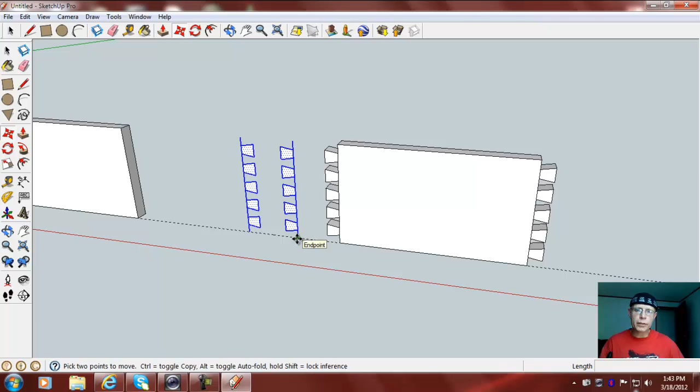They're not components or anything, so just slide them out of the way.

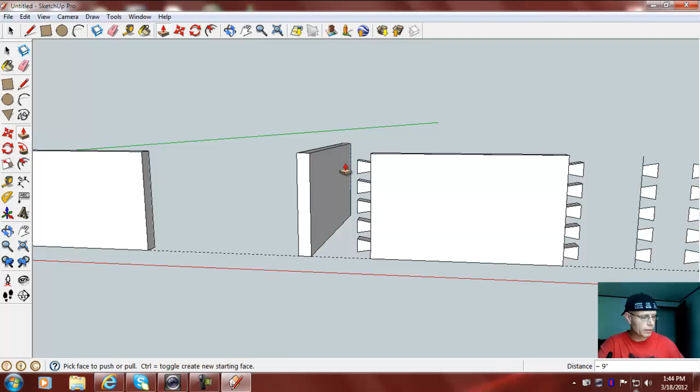Now we need our other side, so we need a rectangle that's 0.5 comma 4. This will be for our through dovetails. Push pull that back 8 inches, and now move your component piece into the one we just drew.

Right click, intersect faces with model, and then move the one we just created out of the way. Now hit push pull, and we're going to push pull that back to that line, double click on the rest. So we'll do that, and there we go. I'm not always good at double clicking.

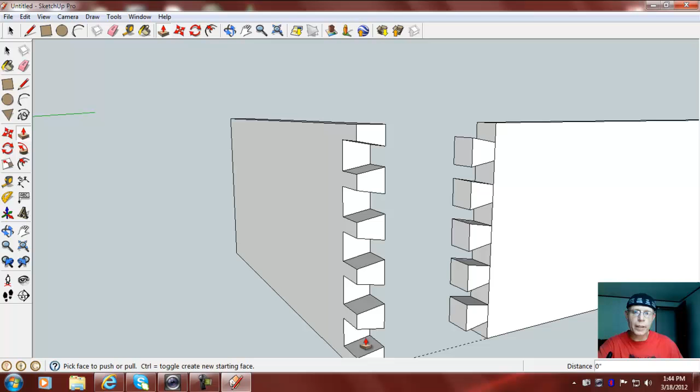And if you look at this now, we join those two together. I could make this a component, but I want to do the back side as well. And the challenge in the quiz was to make half blind and through dovetails out of the same box.

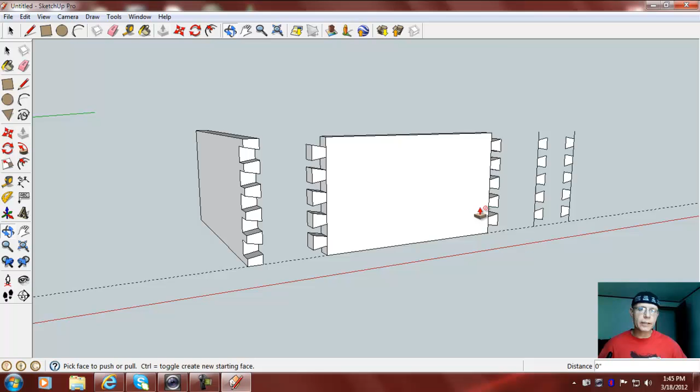So now we need another side and we need a back. So let's draw the other side, and yes, here we go. Let's see. So we're going to make this side, and it's going to be 0.75 comma 4, and push pull that back.

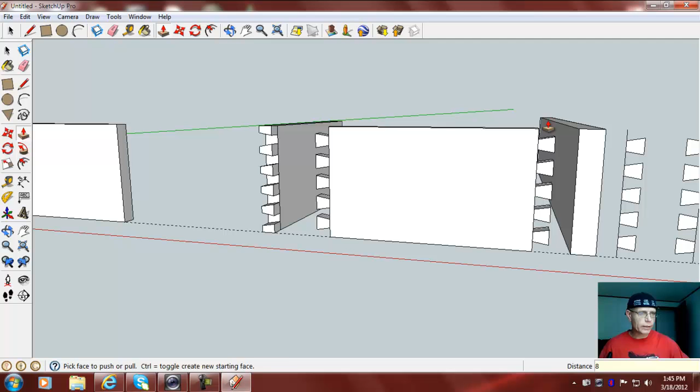8 inches, and now move this over, intersect face with model, move your component back, and push pull those back 1/2 inch, and you'll see now we have some half blind dovetails.

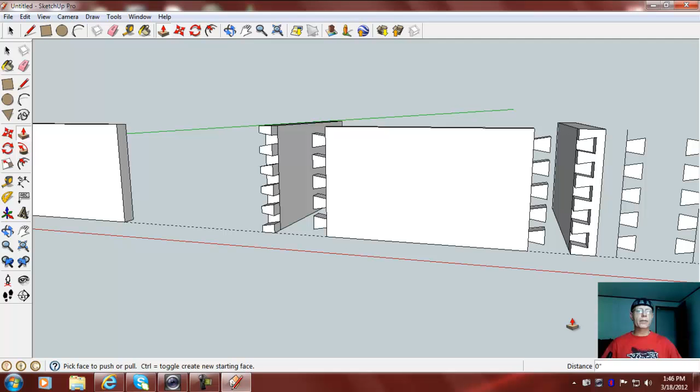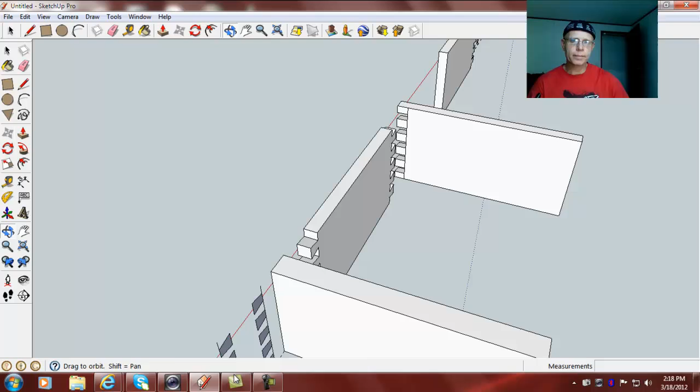Alright, I paused the video for a while and decided how I wanted to do this last part like we did in class. So basically what we need to do, this is already a component, so we want to move and copy that, and so I'm just going to move this back and make a copy of it and explode it so it's no longer a component.

Now if I push pull it, I'm only changing that one, and I'm going to make it 0.25 bigger. So now if I take my tape measure tool and just measure this real fast, it should measure to be 0.75, and it does. So that's the size I wanted it, because for the quiz they had to have two sides that were 3/4 thick and two sides that were 1/2 inch, and they needed through dovetails and half blind.

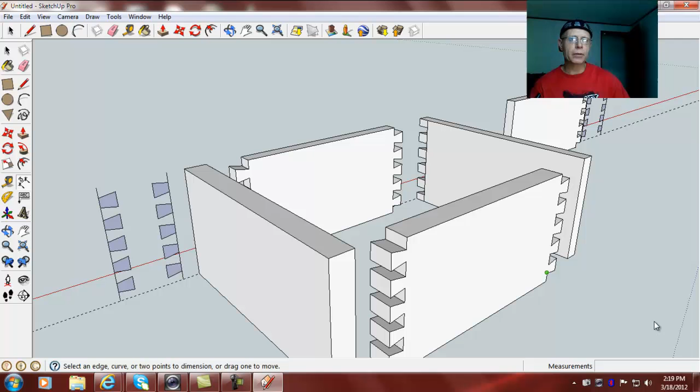So this way they will be getting both, but we do have one more. Let's see if I can do that real fast. There we go. Now I can right click and make it a component again, and create, and we'll call this side 2.

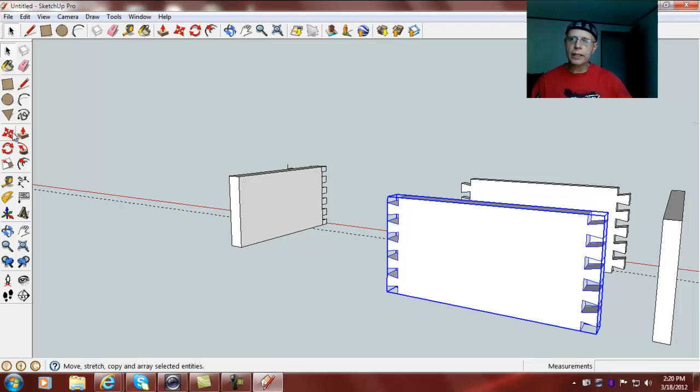There we go. And let's move that and intersect with the face over here. Okay, right click, intersect with model, and move it back. And we need to push pull all these back just like we did in the previous video.

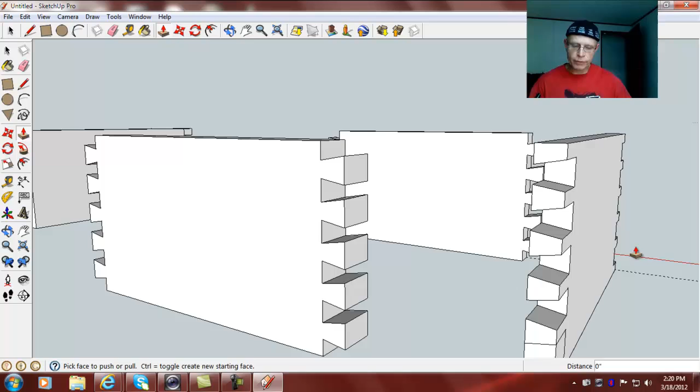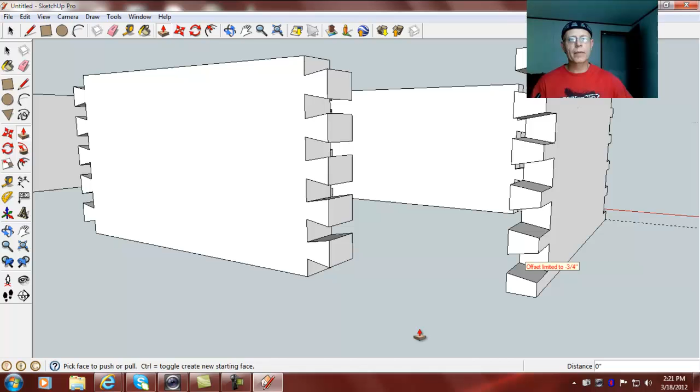Whoop. Okay, we'll just go back to there. Control Z. I always seem to mess one up. Okay, so and double click. There we go.

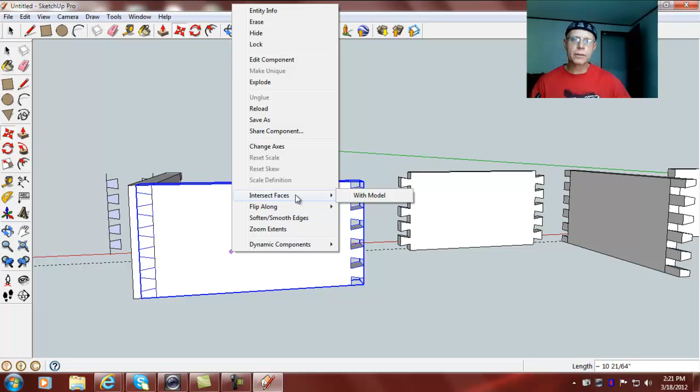Now I can do the same thing over here. I'm going to escape out, select this, move it over to this one, intersect with model, move it away, and push pull all these in. That should be the right size.

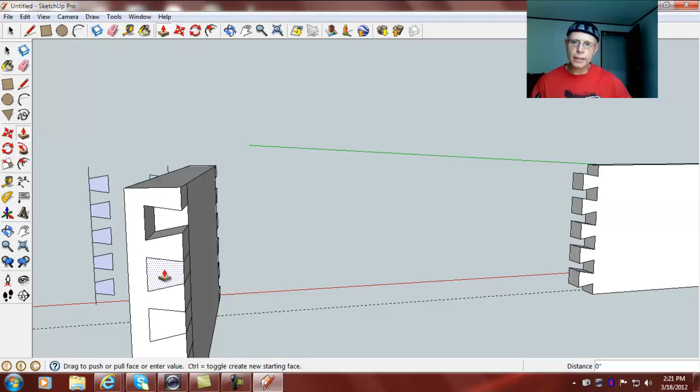Whoop. Like I said, I always try to mess one up. Okay.

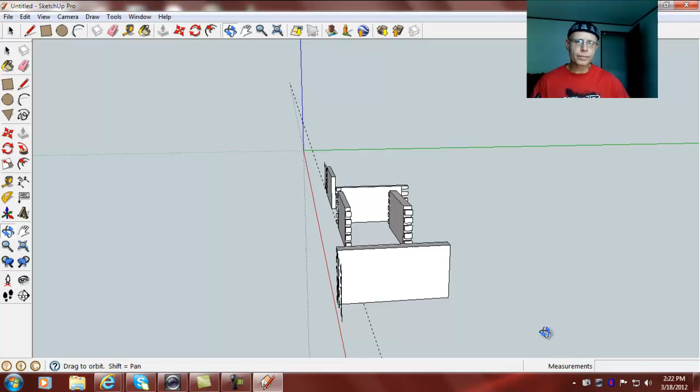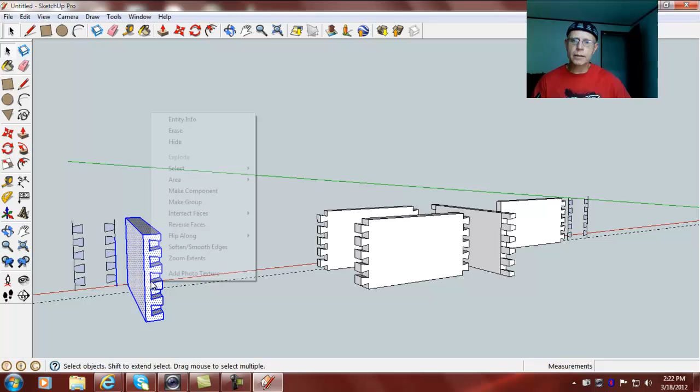Alright, we should be able to put this whole box together. We do have to make these other pieces components, would probably be helpful. So we'll make that a component, call that side 3, and this one a component, and we'll call that side 4.

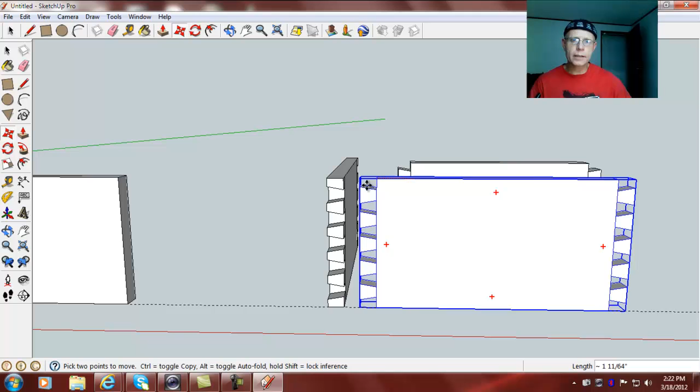And start moving things together. Okay, move this right there. And whoop. Control Z. Did I make this a component? I thought I did, but maybe I didn't. Thought that was side 4.

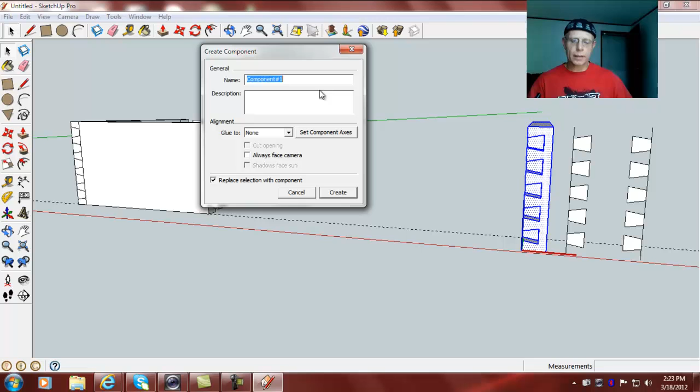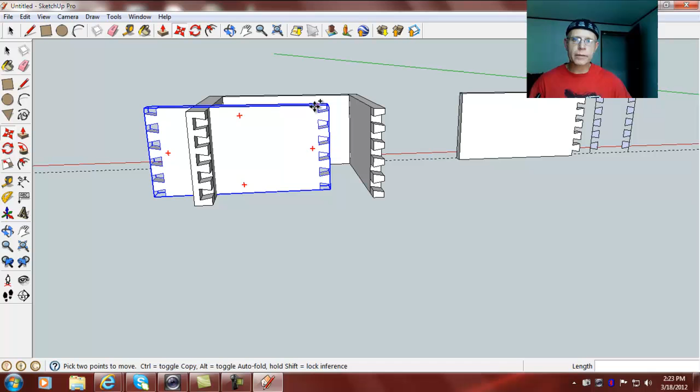Yes, let's replace it. Okay, now it should work. So we'll hit Move Tool again. There we go. And rotate around here, and we'll select this one. Don't want a copy of it, so that's why I erased that.

So now we have a box, and we have half blind on this side, and we have through dovetails on this side. Half inch, 3/4, 3/4. If I wanted to just take some measurements here, we've got a 7 by 6 3/4.

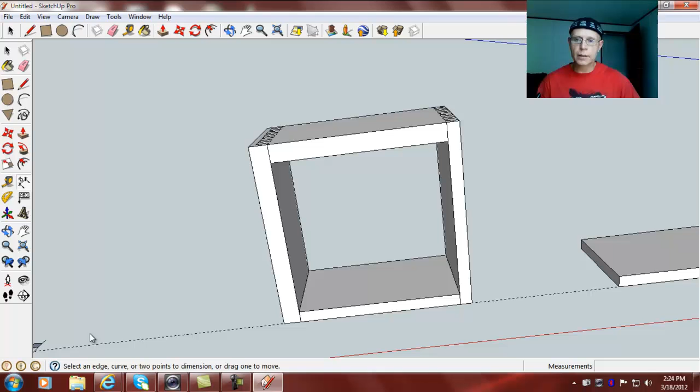So if I draw a rectangle, seven, 6.75, and then push pull that 0.25. There's the bottom for us.

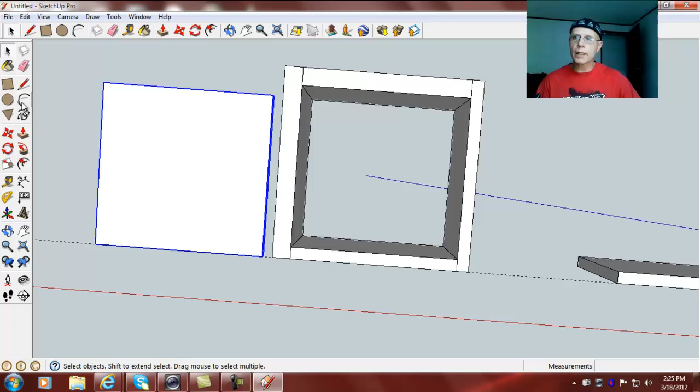I think I did the right dimensions, and we could make that a component. Call that bottom, create, and we could easily just grab this right here and put it right in there. And whatever joinery you wanted to use for the bottom, you could.

If we wanted to go a 1/4 inch in on all the way around, we'd make it a little bit bigger and have to do some kind of a groove.

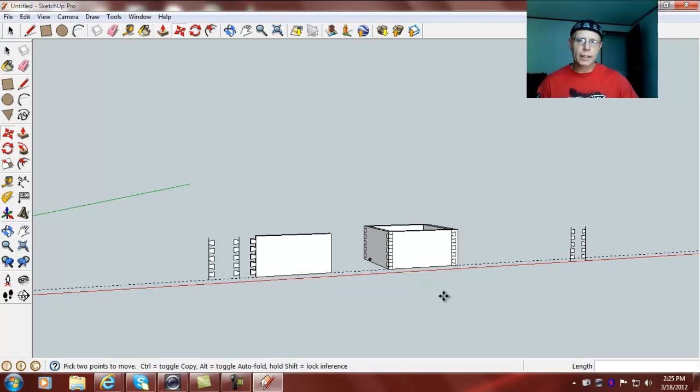Okay. And then in Scott's video, he actually started changing the color of everything by painting it. So selecting a wood grain, there's cherry, so we could go cherry on that side, and this side, and then we could do oak on this side.

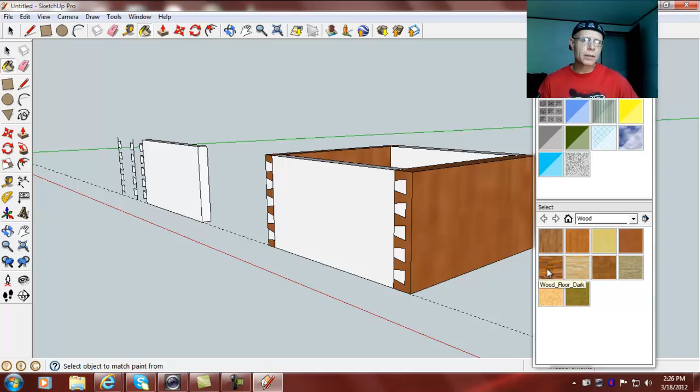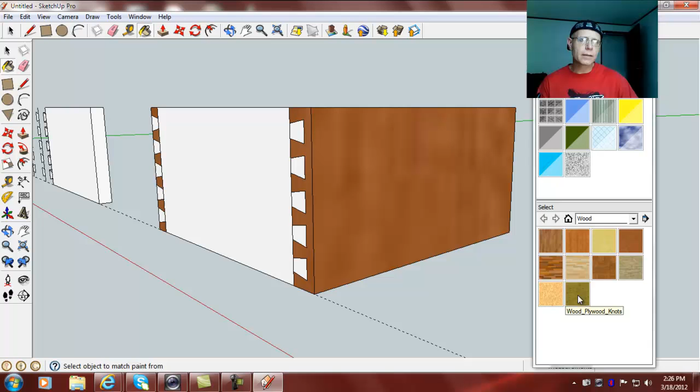Let's try a different color. Let's use this just to show some contrast. Now that's really ugly, so not that one. See what the wood floor looks like. There you can see some difference.

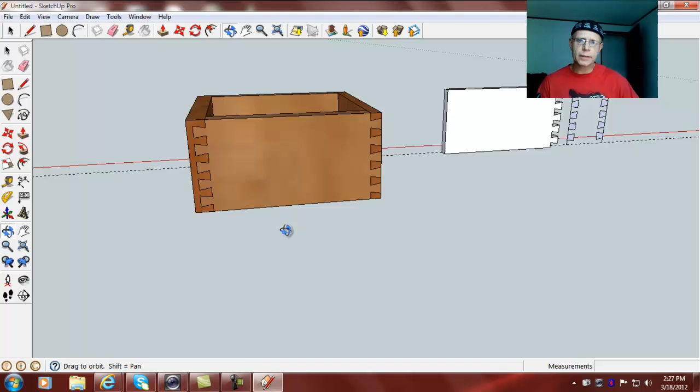You could also play with the grain direction of the way this wood is going. But that allows you to see a through dovetail versus a half blind. And then the last thing to do would be, I guess, to paint the bottom, and that we could make this nice ugly plywood, I guess. Looks like particle board.